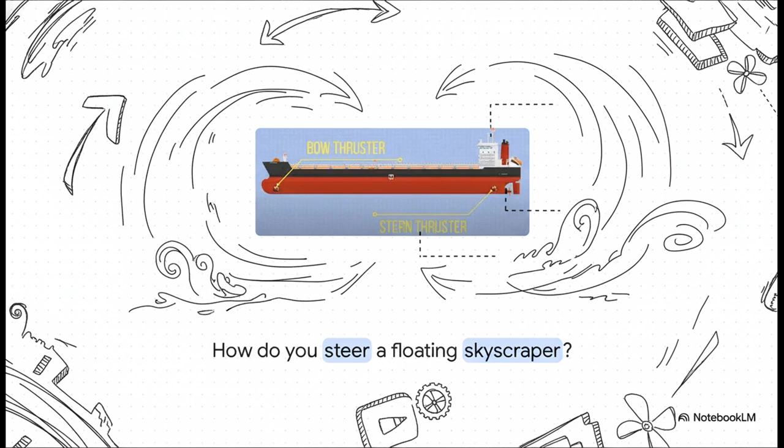Have you ever looked at one of those massive container ships and wondered how on earth do you steer something that big? It's like a skyscraper floating on water. Today we're going to dive deep into the incredible engineering that makes it all possible. Just look at this thing. We're not talking about your average boat here, this is basically a floating city block. When you've got hundreds of thousands of tons of steel moving through the water, a simple steering wheel just isn't going to cut it. So what's the secret? How do they pull it off? Let's get right into it.

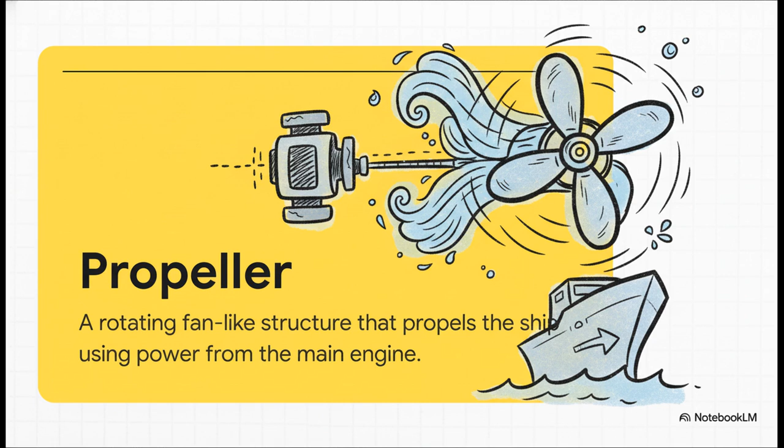Before you can even think about steering, you got to get moving. You need pure, raw power. And for these giants of the sea, it all starts with the propellers. This is the engine room of the whole operation. So what is a propeller? The easiest way to think about it is like a huge, incredibly powerful fan. But instead of pushing air, it's designed to bite into the water, grabbing it and throwing it backwards. That motion converts the engine's power into forward thrust, pushing the entire ship through the sea.

Now, not all propellers are created equal. You've basically got two main types. On one hand, you have the fixed-pitch propeller, the workhorse, simple, super durable, and cost-effective. But then you've got the more advanced controllable pitch propeller. Its blades can actually change their angle, or pitch. This makes it way more efficient at different speeds, kind of like having gears on a car.

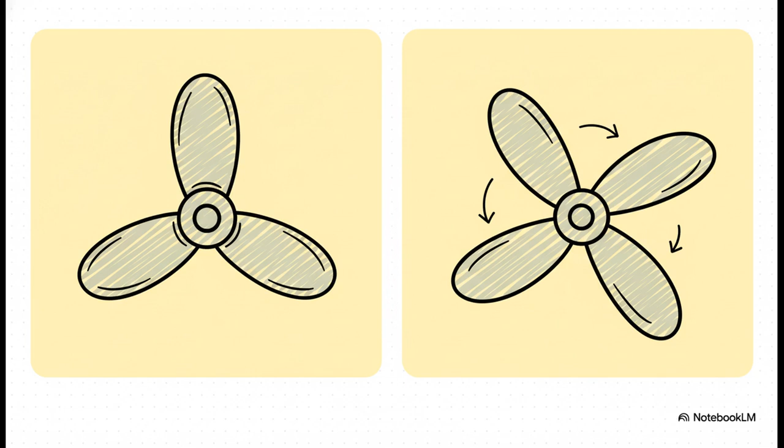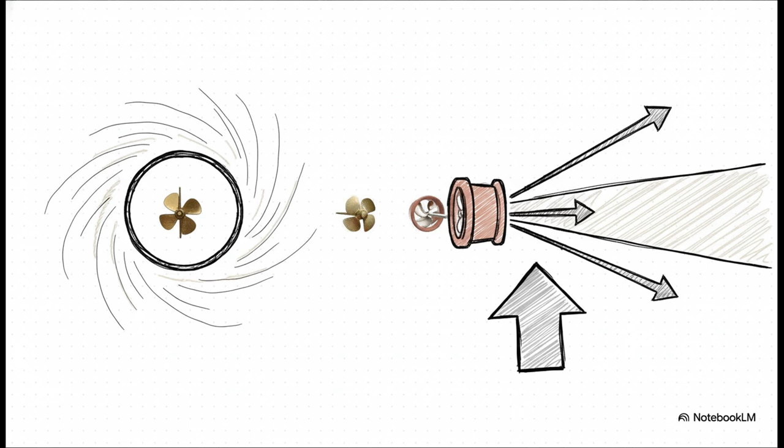Here's another key design difference. On the left, you see a standard propeller, just out in the open. But on the right, that's a ducted propeller, sometimes called a kort nozzle. See that ring around it? That's not just there for protection, it actually funnels water directly into the blades, which can seriously boost the propeller's power and efficiency.

Okay, so the propeller is pushing us forward, we've got momentum. But how do we actually tell this colossal vessel where to go? All that forward power is totally useless if you can't steer. And that's where the rudder comes in, that huge fin you see at the very back of the ship. It works a lot like a fish's tail. As water flows past, turning the rudder creates a pressure difference, high pressure on one side, low on the other. That difference literally pushes the stern of the ship to one side, causing the whole vessel to turn. It's basic physics, just on an absolutely massive scale.

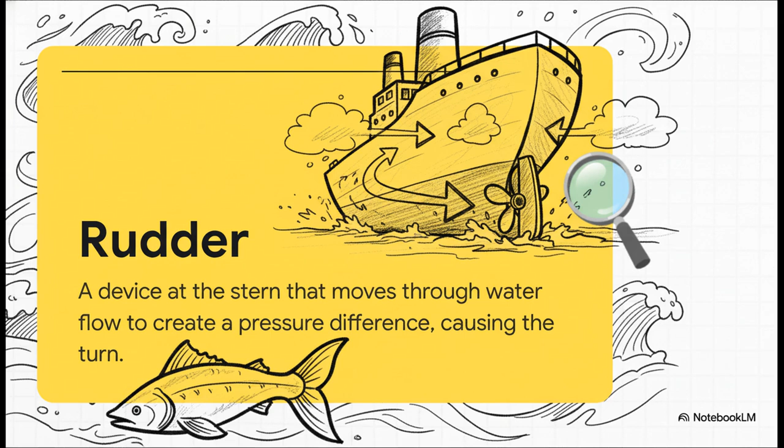And this is where the engineering gets really clever, it's not just one design. As you can see in this chart, it all comes down to where the rudder's surface is relative to its pivot point. A balanced rudder has a good chunk of its area in front of the axis, which means it takes way less force to turn. For a giant ship, that's a game changer. An unbalanced one is simpler, but you need a much more powerful system to move it.

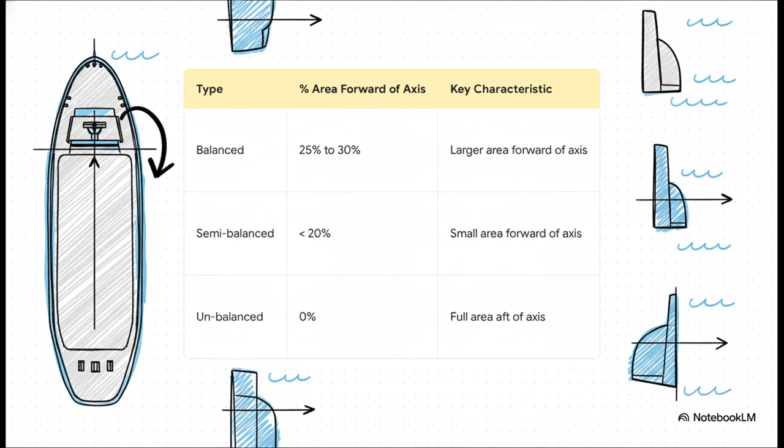So there's a catch with rudders, they only really work when the ship is moving forward and has a good flow of water going past them. So what do you do when you need to make super slow, precise movements, like docking a massive cruise ship in a tight, crowded harbor? This is where thrusters come into play. They're basically small propellers, or jets, built directly into the hull of the ship and they point sideways. You'll usually find one up at the bow, and another at the stern.

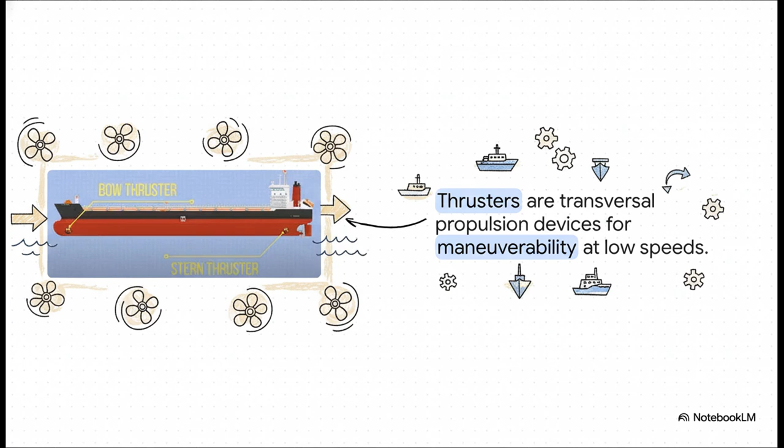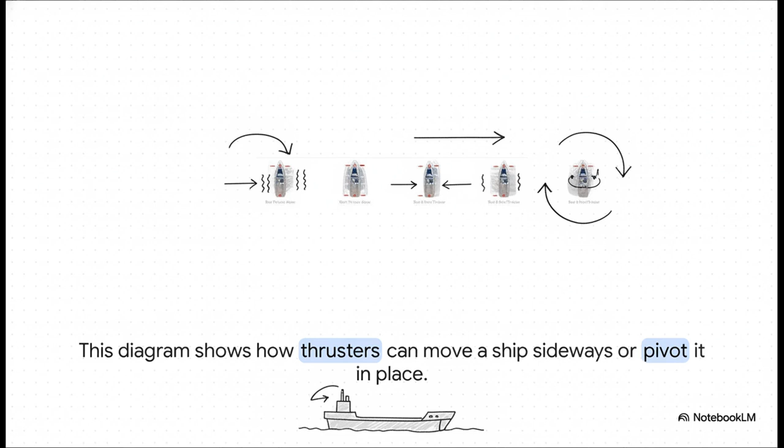And this is their secret weapon. The captain can fire up the bow thruster to push the front of the ship to the side, or use the stern thruster to nudge the back. And by using them together, they can do something amazing, they can move the entire ship perfectly sideways, or even pivot in place without moving forward an inch. It's all about that fine-tuned precision control you just can't get with a rudder alone.

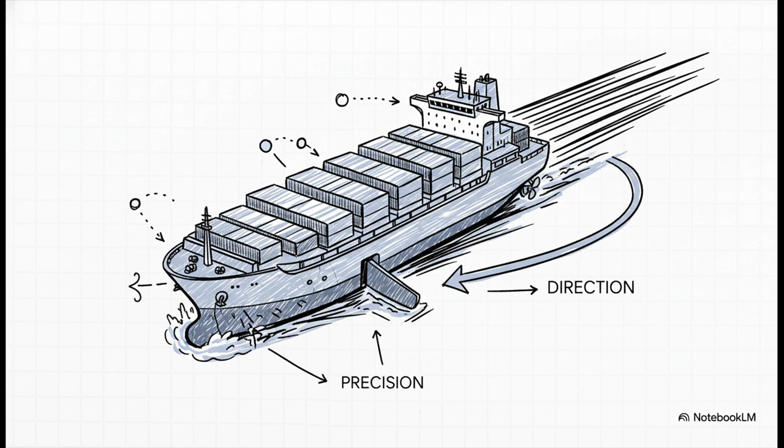So let's put all these pieces together. It's not about just one of these systems, it's about how all three work together in concert. You can really think of it as a perfectly coordinated symphony of movement. The propellers are the huge percussion section, laying down that powerful driving beat that gets everything moving. The rudder, that's the conductor, guiding the whole orchestra and setting the main direction. And the thrusters, they're like the woodwinds, adding all those delicate, precise notes you need for the really intricate parts of the performance. Power, direction, and precision, all working as one.

But what if you could combine parts of that orchestra? Well, that's exactly what the azimuth thruster does. The entire unit, the propeller and everything, can spin a full 360 degrees. This means you can point the thrust in literally any direction. It's both the engine and the rudder all wrapped into one incredible package. You see these on tugboats and ferries, and it's what makes them so unbelievably agile.

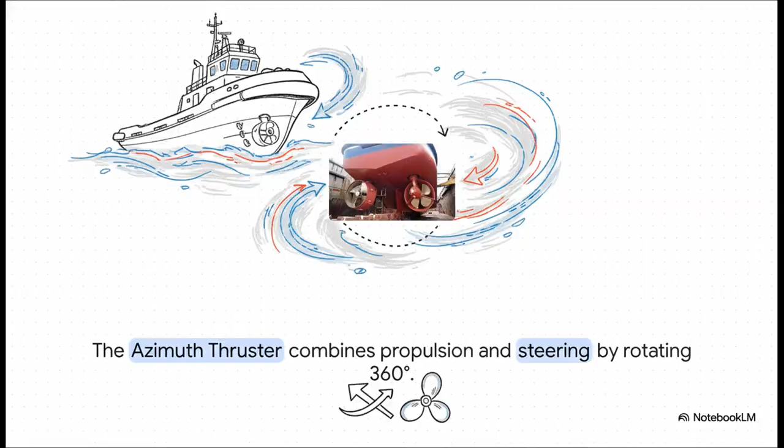Pretty cool, right? And that really brings us to a fascinating final thought. We're already seeing technology like the azimuth thruster merge power and steering into one. So it makes you wonder, is the classic setup of a separate propeller and rudder on its way out? Could we be heading towards a future where all ships are controlled by a single elegant system? That's a really interesting question to think about for the future of shipping.